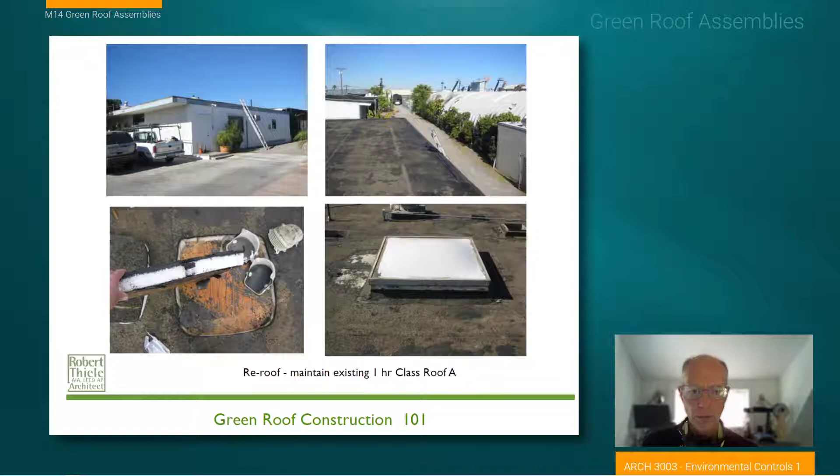So this is just a quick visual of an installation, a retrofit of a green roof, just to give you an idea of the buildup of layers. We don't even get in the end to actually the vegetating of it, but here we have a retrofit. So we have an existing roof. Looks like they've cut a sample to find out what kind of performance they have with this roof.

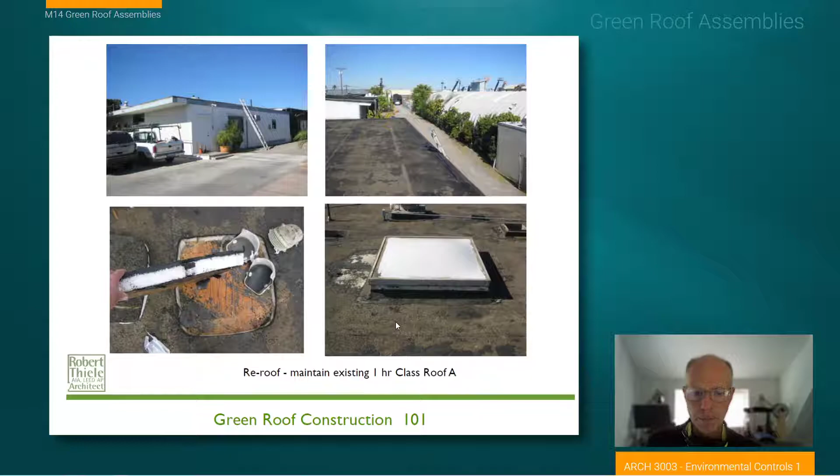Looks like they're doing some site surveys, thinking about these ideas of what they need to do to accommodate any penetrations through the roof assembly. Here we have them putting down the waterproofing membrane and what looks like it might be an insulation material. And here we have a detail of probably a waste line vent and the flashing detail that goes along with that.

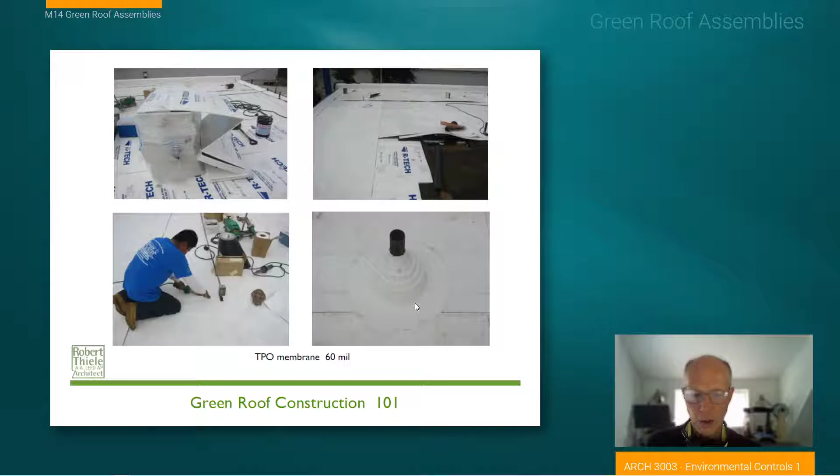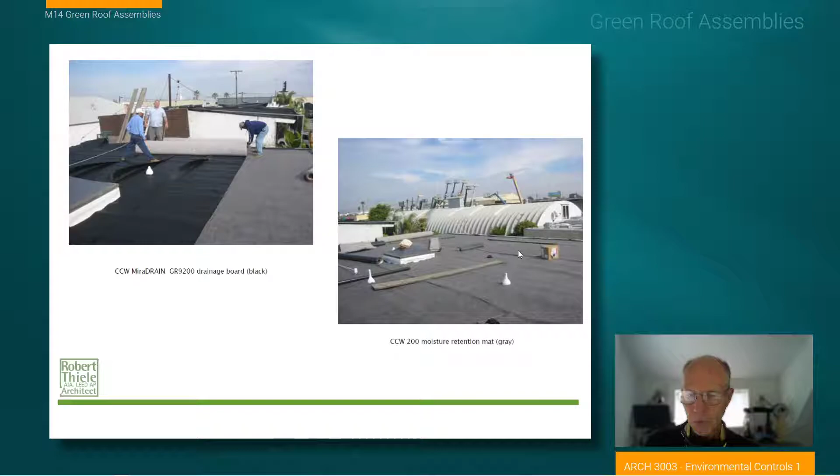And then over that we have the drainage board, which is labeled in black, and then this moisture retention mat, probably a non-woven material like a very thick carpet, helping to hold moisture underneath what would be a relatively thin soil layer to reduce weight. Now we're applying our soil to it.

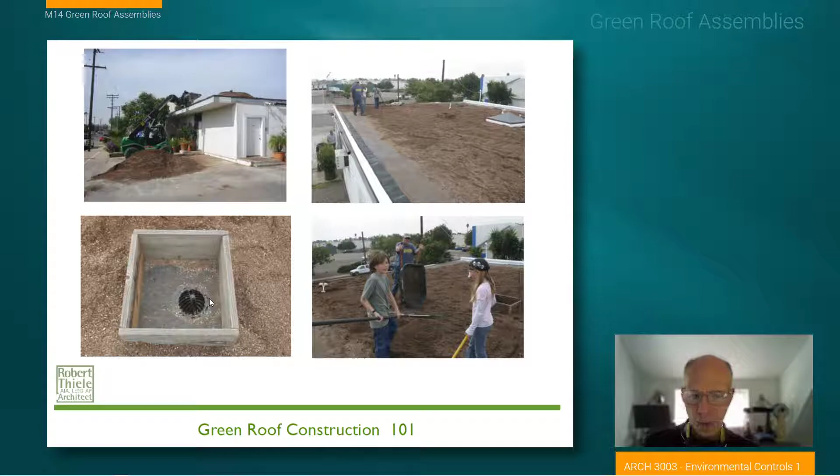This graphic here should point out this idea of this is new dead load that's being applied to the roof system. You can see where they built up this roof drain with an area around it so that it won't clog up. It's probably not the best detail, but it's at least the visualization of this needing to pay attention to this idea of protecting these drainage systems.

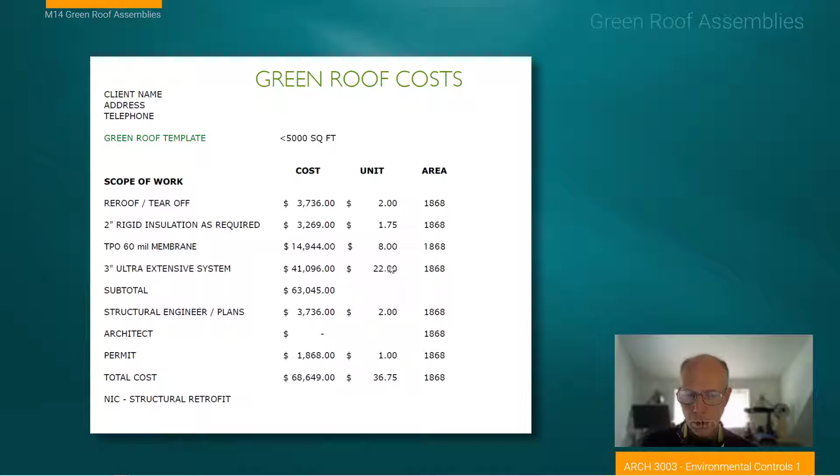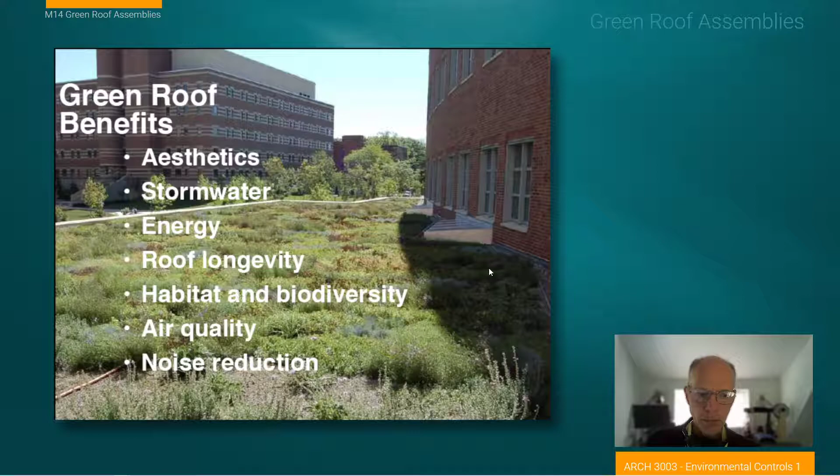And I think the last important issue about this for any of these projects going forward is that they're not cheap. Obviously the membrane systems would be incorporated in normal roofing, but the other attendant mat materials and root barriers, vegetation material, all of that can add up to a very significant cost in the total roof construction. So important to keep in mind at the onset is to start to present these ideas of cost into the project very early. And so that kind of wraps up the idea of green roofs as you prepare to do your lab.